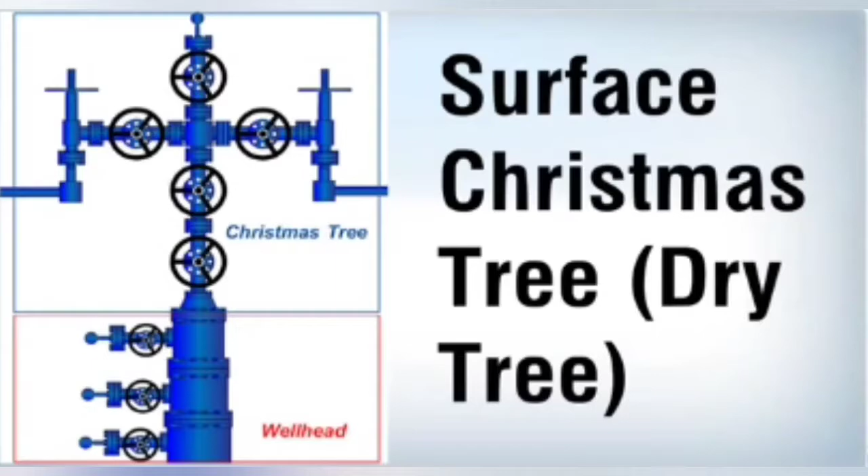A master valve is located above the tubing hanger, and its function is to allow the well to flow or to shut the well in. Typically, there are two master valves: one is called the lower master valve, and another is the upper master valve. Two valves are often used because they provide redundancy. If one master valve cannot function properly, another valve can perform the same task. This illustration shows a simple diagram of the upper and lower master valves in the Christmas tree.

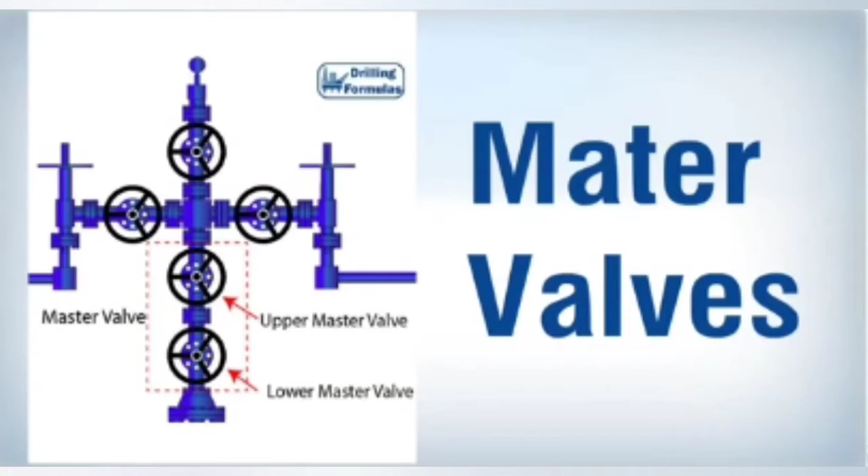T-type fitting, or T-block, allows diversion of the flow stream from vertical to a horizontal flow line.

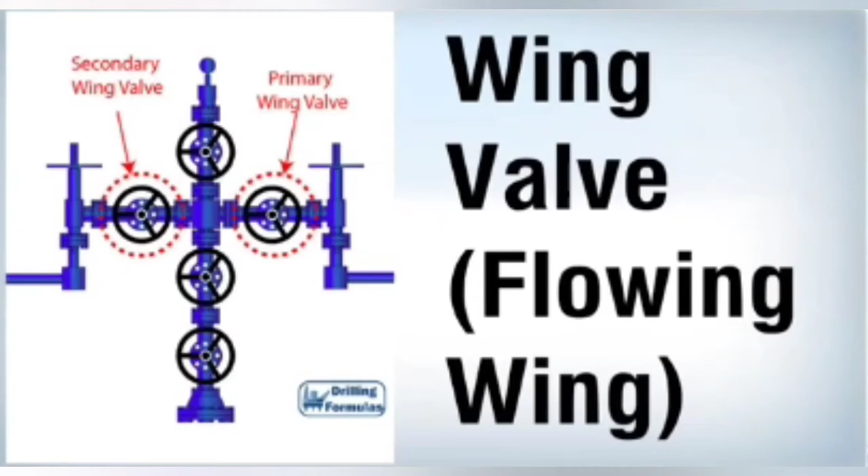A wing valve is located on the side of a Christmas tree, and it is used to control or isolate production from the well into surface facilities. Depending on each design of a Christmas tree, it can be equipped with one or two wing valves. Some operators require two production wing valves, one as the main production valve and another as a backup valve. In many cases, one wing valve is used for production and another wing valve is used as a kill wing valve.

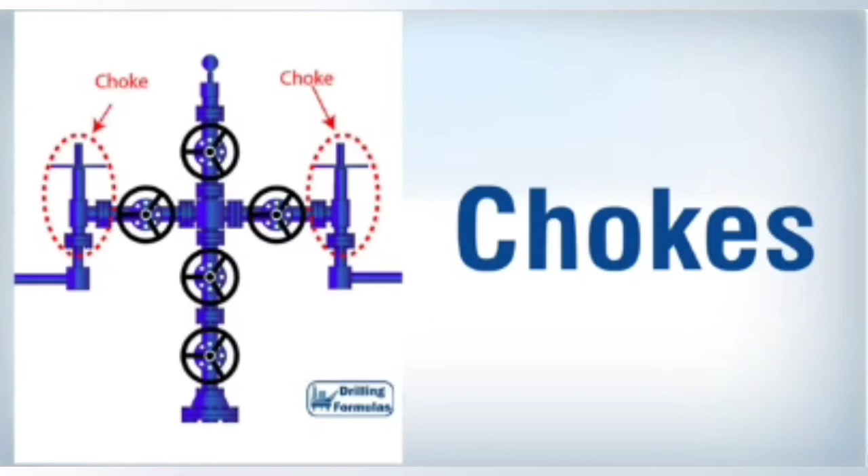Choke is the smallest restriction in a Christmas tree, and its function is to control the production rate of a well. It is also used to control sand production in some cases. A choke restricts the area for production flow through a bean, or an orifice, inserted into a choke body. Two types of chokes are as follows: the first is a positive choke with interchangeable beans, and the second is an adjustable choke which allows adjusting the choke size easily.

On a Christmas tree, a swab valve is the topmost valve, providing vertical access to the well for well intervention operations conducted by wireline, slickline, coiled tubing, or a snubbing unit.

T-cap is a flange located on top of the swab valve, which allows a wireline lubricator or a coiled tubing snubbing unit BOP to connect to a well, in order to perform well intervention programs.

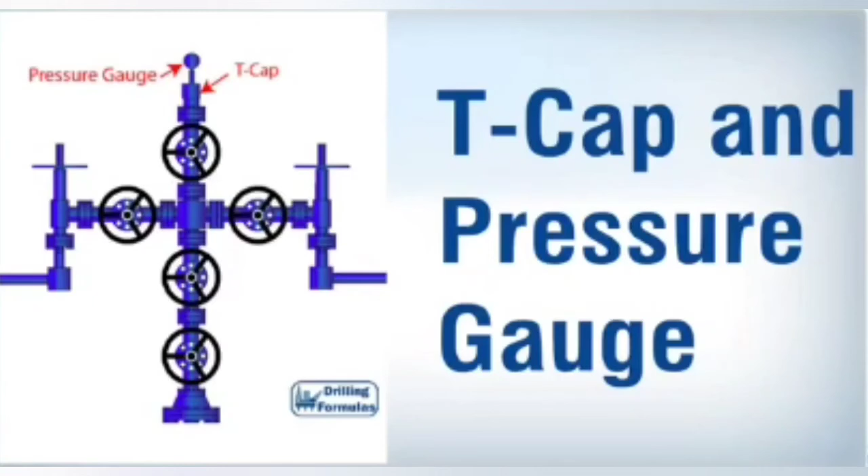A pressure gauge is used to monitor the pressure of the well. Nowadays, most operators often use electronic gauges so pressure and temperature data can be transmitted via an electronic system for better well monitoring.

A unitized Christmas tree is an integrated Christmas tree, which consists of a lower and upper master valve, and a swab valve in one body. This will allow an operator to save operational time for installation.